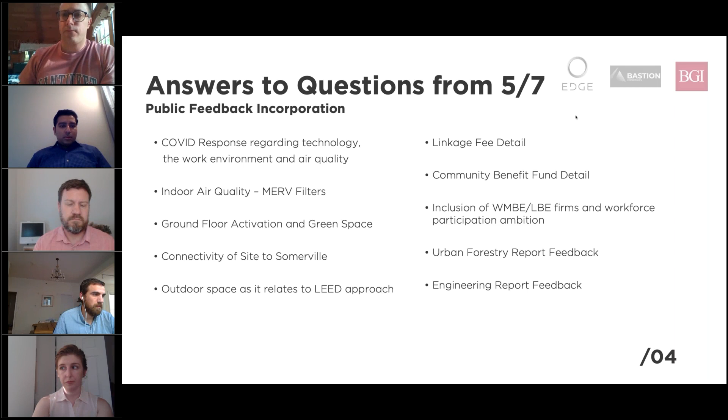So just to get right into it, these are the issues that we saw as open questions or items requiring clarification from our 5/7 meeting. I'm going to run through a list of these: COVID response regarding technology, the work environment and air quality, indoor air quality in general, specifically regarding MERV filters, ground floor activation and green space, connectivity of the site to Somerville, outdoor space as it relates to LEED approach, linkage fee detail, community benefit fund detail, inclusion of WMBE and LBE firms and workforce participation ambitions, urban forestry report feedback, and engineering report feedback.

So we're going to start off with the COVID response. First and foremost, as discussed in our last presentation, we believe that our four pillars and the values we have as a company addressed the COVID situation before it happened. The values we include in sustainability and wellness and well-being, specifically air quality, are all being managed through innovative design and through technology, which are all areas where you can address these concerns.

So today I really wanted to focus on the technology aspect of that, because technology is really the foundation and the founding principle behind everything. Our biggest ambition here is we want Edge Assembly Square to be the smartest building in the Boston market. We believe through our experience and through our smart package platform, this is the true opportunity for the site. This is made up of a few different parts: one, it's an integrated data platform, which we'll call the hardware - this is the IP backbone infrastructure and sensors throughout the building. It includes a seamless user interface, which we'll call the software, an interface that the building manager and individual tenants are able to use to see how the building's performing and how their space is performing, as well as their employees.

And all of this is future proof. We make sure that as new applications come in the future, whether it's 5, 10, 15 years down the road, those technologies that are an evolution of what we have today are able to be applied to this building.

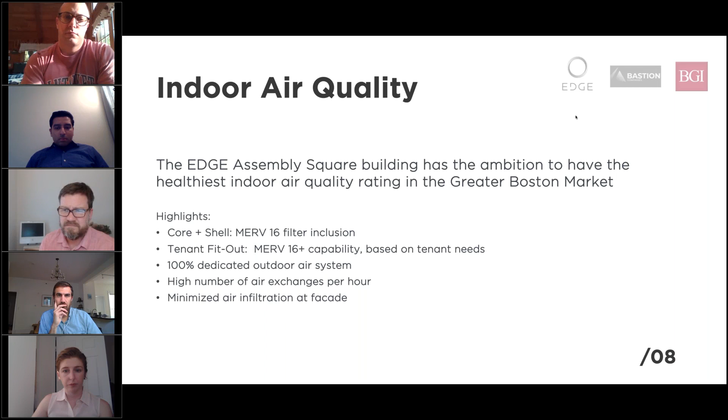So having the intake on top is step one, having a two-stage filter—one to take out major particles with the MERV 8. Then the DOAS heat exchange happens, dedicated outdoor air system exchange, and then a MERV 16 below it, meaning all the incoming air before it gets to the tenants is at that surgical suite level. Then there'll be tenant fit-out, and what we're accommodating for them is to either continue the MERV 16 air or go up to MERV 17 or higher. Laboratories often do this anyway, but having the MERV 17—this is what we're doing at AECOM with our own spaces—is having the ability to go up to MERV 17 for COVID-19.

So building that in is really the final piece, where the air is already coming in at a high quality, and then it has the opportunity at the tenant level, when they take over the fit-out, to go to the next level or all the way up as high as you want to go.

Yeah, and Jason, I would just end that by saying I'd like to thank WIG for helping influence us in making sure that we're very clear to the marketplace that it is our complete intention to have the healthiest building in the marketplace. We want that to be clear to whoever is researching our building, looking at it from a tenant point of view or from the public point of view, as we're just trying to set the example for all the buildings in the marketplace.

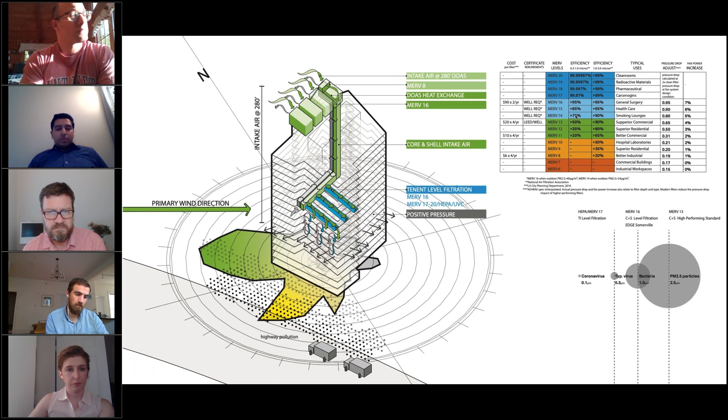In addition to being an incredibly healthy, high-performing building, we want this to be a good neighbor. We touched on this last meeting, but wanted to emphasize the presence this building will have at the ground floor, at the street. Everything in the footprint shown in light blue is meant to be transparent and either public or front-facing: retail along Middlesex Ave, along the front part of McGrath Highway access, and the lobby and potentially cafe retail space fronting the Kensington parcel, which we're talking about redeveloping as public open space. The goal is a very strong public face with no dead edges where the public is moving, minimizing the back of house footprint as much as possible on that ground floor.

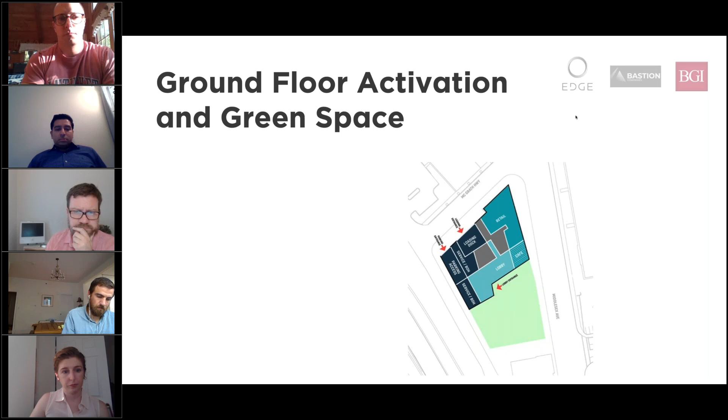To build on that green space story, we talked about this a bit last time too, but wanted to clarify our goal: consistent with making this the healthiest, highest-performing building we possibly can, we want to introduce as much green space as we possibly can into the building. Up the building, on the tenant floors, that's through a combination of outdoor terraces, green balconies, and interior winter gardens and atrium spaces throughout.

We'll be looking at opportunities on the roof, though the reality is we've probably got so much mechanical equipment, plus an effort to get a great photovoltaic installation up there, that most of that green space is going to be confined to the floors. But we also really want to emphasize what is happening in that public open space.

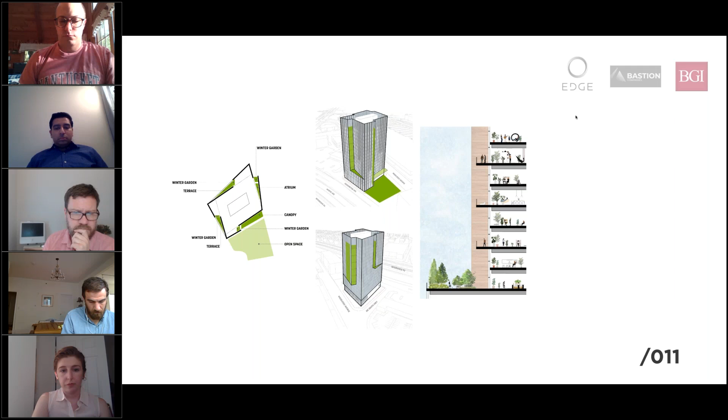Consistent with the air quality conversation we were just having, we recognize this site's location adjacent to the highway and the challenges with potential air pollution from that space. We do want to redevelop this public open space as something vital and vibrant. We see this site as a real node and hub of public connectivity for vehicles, pedestrians, bikes, and buses, both through the Kensington connector underneath the highway, and moving back into Assembly Square to the Orange Line T-stop along McGrath Highway, really focused on getting the bike share program in, shown in that glowing blue bar along Middlesex Ave, as well as additional bike parking.

The nature of this public open space, because we want to make something exciting and vibrant, redeveloped as a great entry point to the area, but this is not a place to come play a soccer game, or spend six hours having a picnic. We see it as beautiful, landscaped, giving a sense of health, but it is a transient outdoor space. You might have a cup of coffee and sit for half an hour while waiting to go to your office or waiting for the bus. You're passing through it, but it's not meant to be a long-term hangout space.

That doesn't mean it shouldn't be beautiful, heavily landscaped, and an attractor, but we don't see it as a landscape meant to encourage long-term habitation, given the nature of the site. We do want it to be a wonderful place.

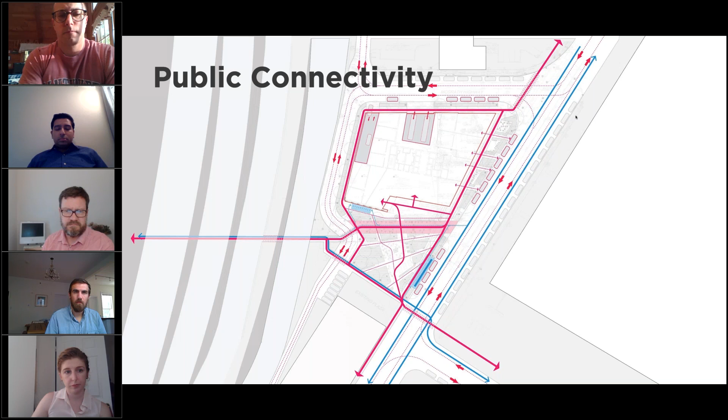Thanks, Victor. I think we want to talk about how we see that outdoor space supporting the LEED mission of the project.

Thanks, Victor. One of the great things is that as much as we have high-performing mechanical systems, the site itself is something we're looking to operationalize as much as possible to participate in this, and that's evidenced in the LEED scorecard.

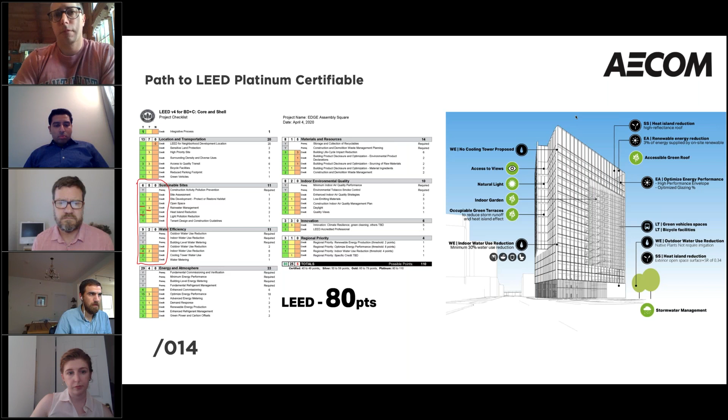To get back to some other items - inclusion. Inclusion is one of the 5 core values for this project, I want to make that very clear. We're going to explore all possible opportunities throughout the project procurement process. We can commit to tracking our ambitions and progress throughout the project, and we can commit to creating an inclusion program with our construction manager once that construction manager is hired. We just wanted to present what we can commit to today with where we are now, and promise that it's going to be a core value throughout the whole development process.

When it comes to the linkage fee, it's quite prescriptive, so I'll bring you through how we got there. It's based on gross square footage. In our submission, we proposed 525,000 gross square feet, and per ordinance 2017-16 15.5, plus the latest updates, it's $10 per gross square foot on all gross square feet after the first 30,000 square feet. This goes towards the Somerville Housing Trust. On top of that, it's another $2.58 per gross square foot towards the Somerville Municipal Job Creation and Retention Trust, on every gross square foot after the first 15,000 square feet. The estimated fee here is about $6.275 million, give or take.

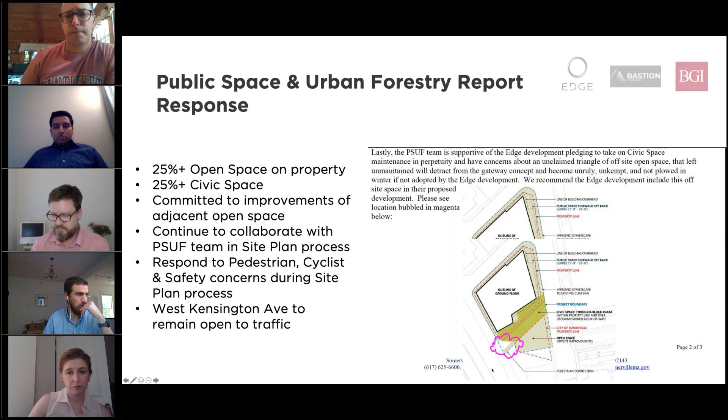The other report that we received, around the same time as our previous hearing, was the engineering division report. They had 5 major comments.

They did not want to discontinue Kensington Avenue, or recommended it not be discontinued as a right-of-way. I think it can continue to exist as a public right-of-way, providing underground space for underground utilities, pedestrian connections, cyclists, emergency access. We are looking for integrating a portion of the civic space paving to be able to carry fire trucks, recognizing that they've been able to circulate around this block in the past, and we want to be able to continue that accessibility for emergency vehicles. We are proposing that the Kensington Avenue that runs east-west from I-93 out to Middlesex Avenue be converted or repurposed as the civic space through an easement with the city or some real estate vehicle.

Engineering division suggested an easement, and the proponent is amenable to an easement as a vehicle to make that happen.